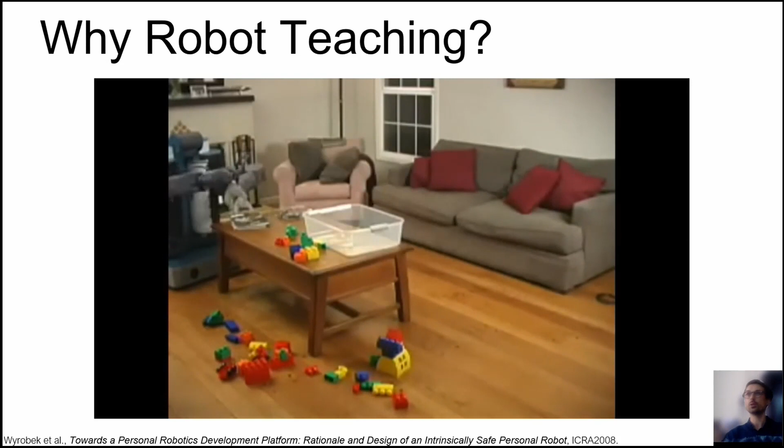Okay, so why robot teaching? Another reference to yesterday, it's this video that I started with, exactly the same video as Frank, independently of each other. So you already know the video if you've been here yesterday. So that's the PR1. That is tidying up a space, and he does so rather nicely. It adjusts his magazines, it uses both arms, it adjusts the pillows, the cushions, and later you will even see it use a tool with another object. So that looks all very impressive. And that video is from 2008.

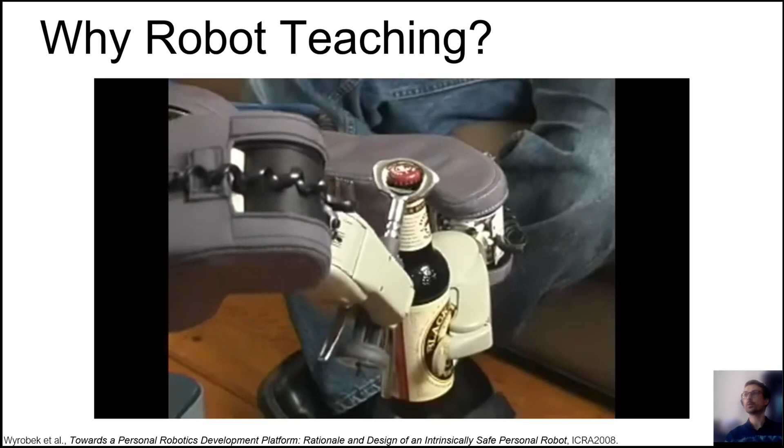And we all know, if you have worked in robotics, that we are still very far from that reality. Frank already mentioned it yesterday, that was all teleoperated. So a human operator operated the robot from another room or from the same room, and was able to do all of that. And why am I showing you that video is that the humans have all of these capabilities, and the robot is mechanically capable of doing that. So can we learn somehow from those skills of the human? That's kind of the motivation for robot teaching in the first place.

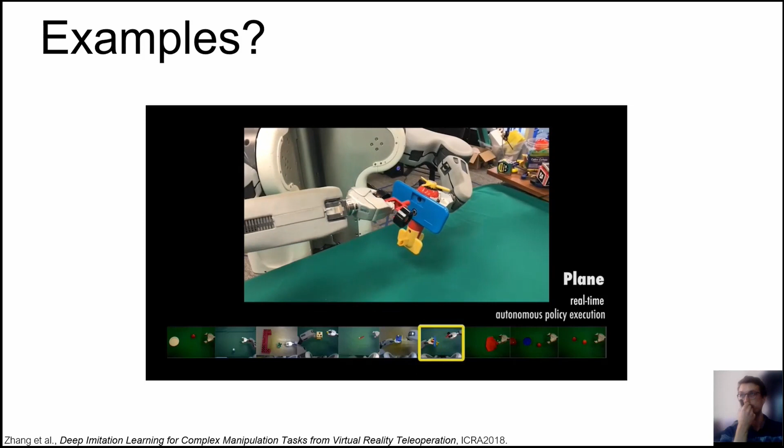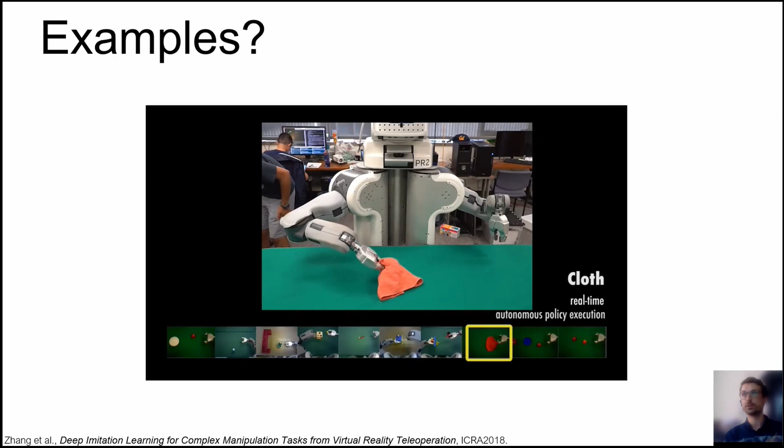Another example, a bit new, but also already a few years old, from 2018, where we now don't see teleoperated anymore, but those are actually learned policies. The human first teleoperates the robot, and then you learn from those demonstrations. There have been some very impressive algorithms over the last few years, and you also see here some very detailed motions, like assembling this toy plane or interacting with a cloth, which is a non-rigid object, so it might be shaped a bit differently all the time. But what is often the case in those kind of algorithms is that the demonstrations are actually generated from the experts, often from the same people who programmed the robot, and they are pretty good.

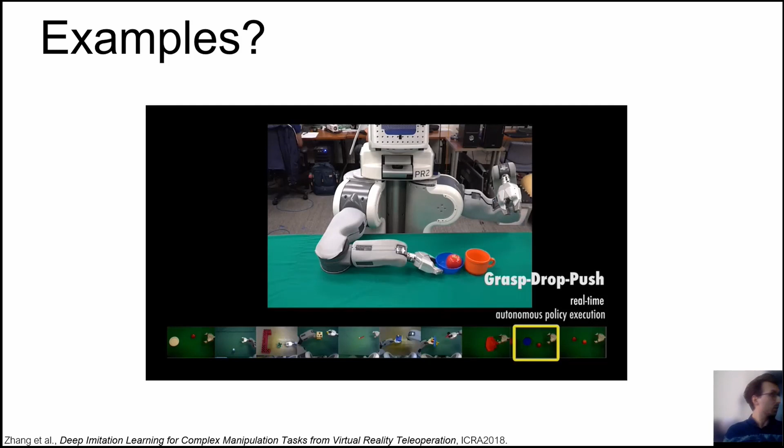And there is much less research on how we can have naive users that aren't robot programmers provide demonstrations or provide some knowledge to the robot that we can learn from. And there is even less research on how that now influences the human teacher. Because only if those algorithms result in some policy that the human trusts, and that the human likes to use in the teaching process, only if the human user sees some benefit in the whole thing will they keep using it, because otherwise it's just a useless robot and they will stop using it after the first two weeks. So that's what I'm interested in: how can we make this whole teaching process a bit easier for humans, and how can we design it specifically for humans?

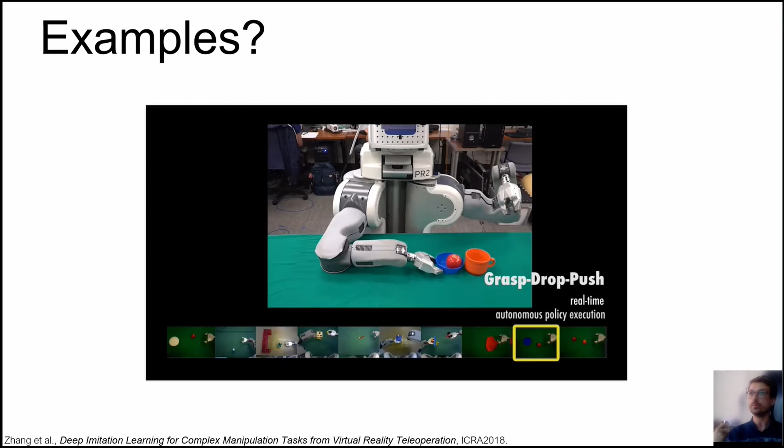And we would like the robot to tidy up that space. So let's say we go to bed, we have a service robot at home. That is our vision: we have a service robot at home, we go to bed, during the night the robot cleans up the whole room, I get up out of bed, everything is tidied up. For example, we wanted to put the mugs into the shelf or wherever they go, put the ketchup bottle back into the fridge, maybe put another box there, and maybe bring out the trash or whatever. And those kind of things are very different for each household.

So each household is very individual, because the mugs will go in the general kitchen area, but they will go in every household into a different cupboard. And the fridge might be located somewhere else, and the maps look very different. So somehow the robot needs to learn that, because it cannot be pre-programmed to know all of that for each household. And the good thing is that we have a human user there. So the human user can actually maybe first tell the robot, okay, the mugs go here, or maybe even demonstrate, okay, look, that's how you put this specific bowl into the dishwasher or whatever.

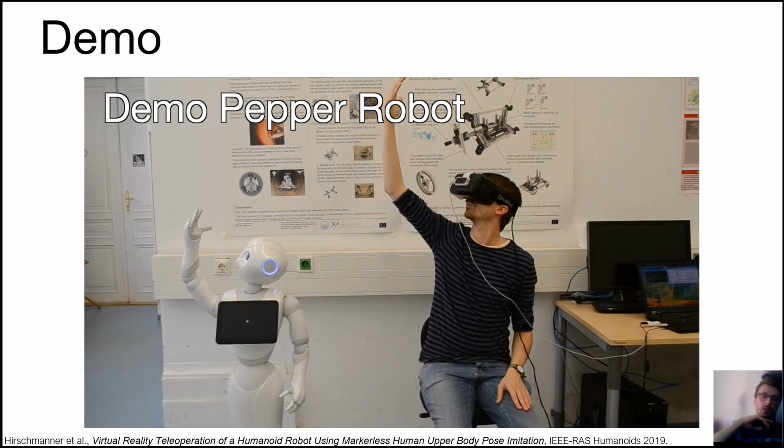Short demonstration. What you see here, I think the video is a bit too long for the time we have, but just the hands being followed, both hands hopefully, if I'm a bit faster. In the end there would also be a short demonstration with the Romeo robot, which unfortunately broke during that time.

Should I be brave enough to skip? Or no, I'll just wait now.

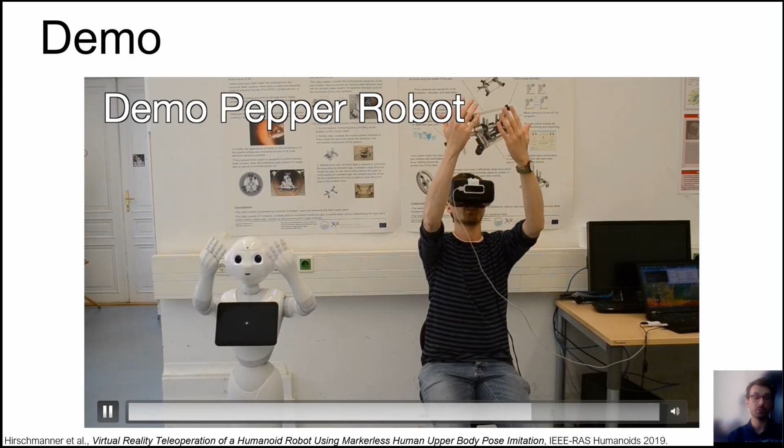I might already skip to the next part. So we also then did a user experiment next, because we were interested in how this actually affects users in terms of workload and comfort and so on.

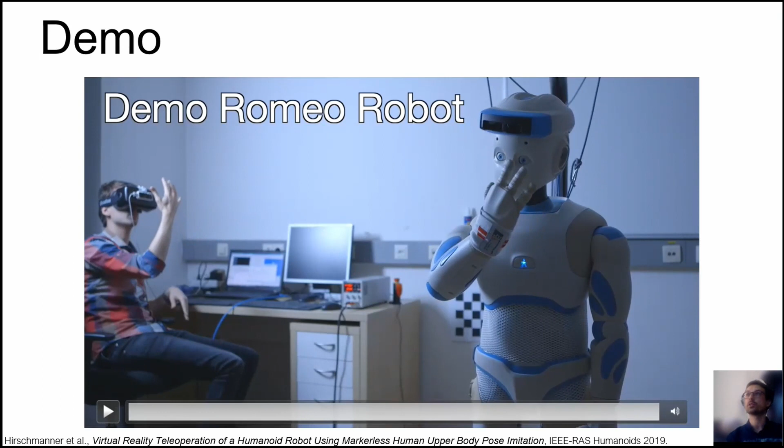That's the Romeo robot. I show it because you hardly ever see it anymore, since I think they built about 9 of them and all of them have probably broken by now. We still have that in the lab. The advantage of that one would be in theory that it has 2 additional degrees of freedom in the hand, because Pepper only has rotation, while Romeo also has pitch and yaw. It also has a stereo camera, so you could make a stereoscopic view for a bit better 3D perception.

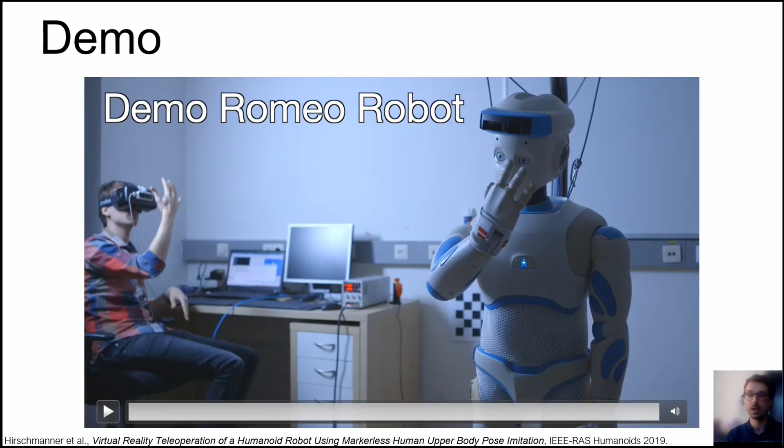In the user experiment with Pepper, as I already said, we had 2 tasks, and we wanted to compare kinesthetic guidance with teleoperation. In kinesthetic guidance, you take the robot arm, deactivate all the motors, and move it the way you would like. Then we programmed it so that you just touch the display to close the gripper, and every participant did that 5 times.

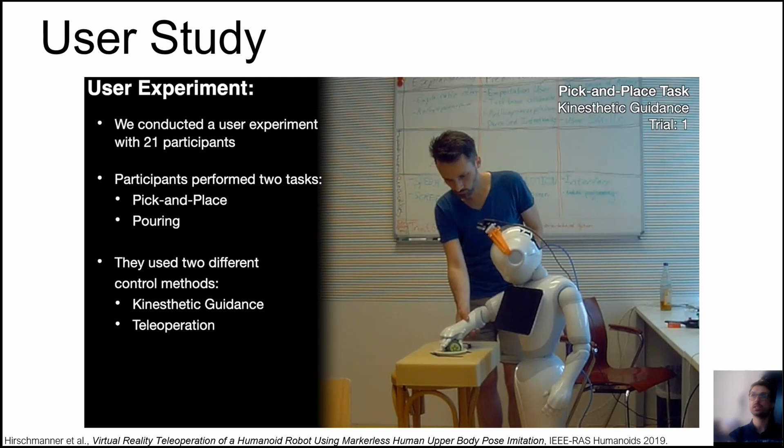So that's the first trial of that guy. It takes some time, and they of course have some learning curve, so they get faster with it. You see he's also faster, but it's also sped up. Now this is the teleoperation system.

And you see in the first trial, the depth perception is a bit off, so he grasped it a bit wrong, but he can correct that through the feedback loop and see, okay, I need to adjust it that way, and then put it there.

We also did a second task where they have to use both hands, to pour something from a glass in the right arm into the pan in the left arm. That's much nastier to do with kinesthetic guidance, and it might be a bit tricky for teleoperation, but in the end it worked out nicer than expected.

16 of 21 participants actually preferred the teleoperation, and users perceived less overall workload during teleoperation. For the pouring task, they were significantly faster. For the first task, the grasping task, they were pretty much the same speed.

So what we also tried then was, okay, can we use that now and learn from it, and learn some policy from that? I'll just play the video.

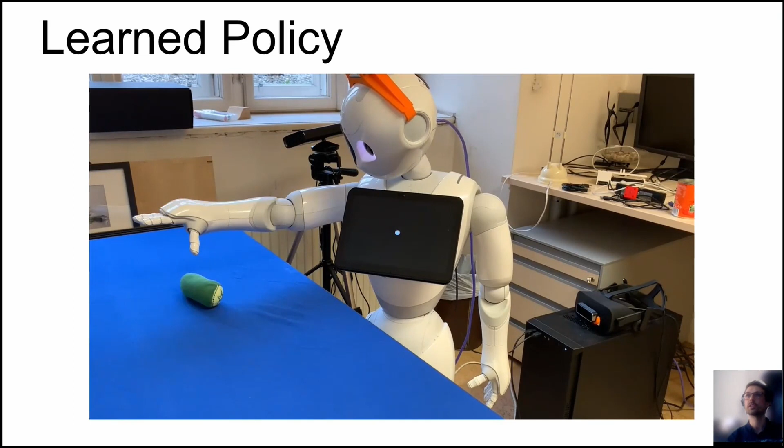So we never published that, because it was just too annoying, and we thought, okay, let's first try to get it to run with a proper robot.

So we tried to use it with a KUKA robot arm, and built another teleoperation system without the VR headset, because we thought that's still a hassle to put everything on.

It's nicer than trying to operate a robot with a mouse and keyboard, but it's still, can we do it in another way?

So here we did it with hand tracking, where the robot follows the tracked hand in Cartesian velocity space, and we tried to train some task. That's what the system looks like. It follows the hand in a velocity sense, so if you move to the left, the robot also moves to the left, and so on.

And you could perform a task like this, so the task we tried to do was just pushing this object over there to that goal. These are the camera views from top down.

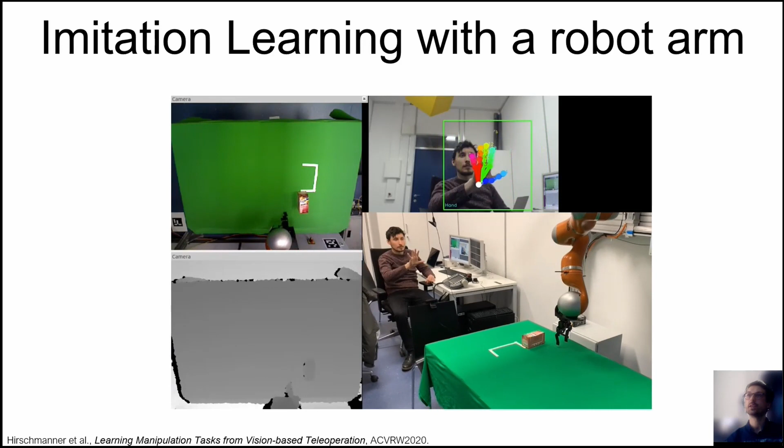So the RGB camera, the depth camera, and we again tried to train an artificial neural network to perform this task, with the input being the images, and the output being the robot control. You see my colleague pushed it to the front and then to the side.

And they were able to learn the policy. It succeeded in many cases, but I think the success rate was not too great, I think it was like 65% in the end.

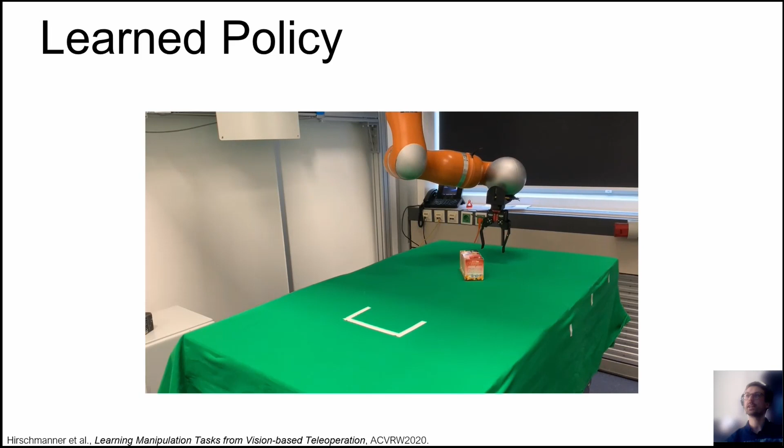And the problem was that on that side of the table, it almost never succeeded. It also didn't learn to perform the action where it first pushes it there and then pushes it to the other side. So the policy was only able to learn this direct movement.

So not too great, but we still published it, and we are now in the process of trying to improve the whole system.

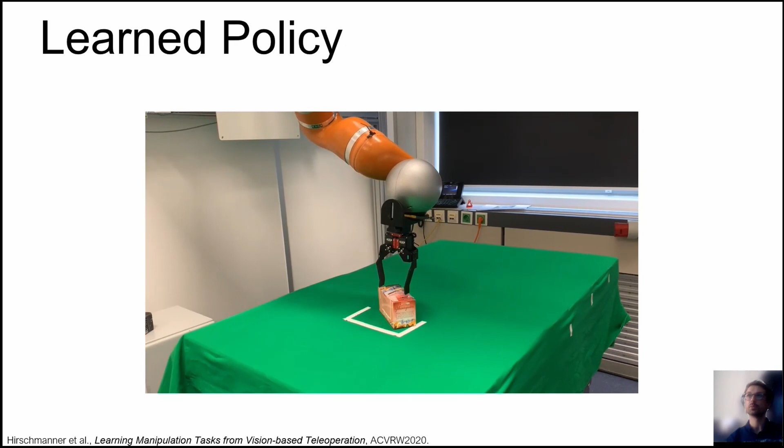We had two tasks there, and we again used a teleoperation setup to record demonstrations. One task was just to reach a certain goal, the other task was to manipulate a cube.

So let's move back to the original scenario, to the room, and that is now still research in progress. We want to build a new pipeline right now, and that is what our group mostly works with.